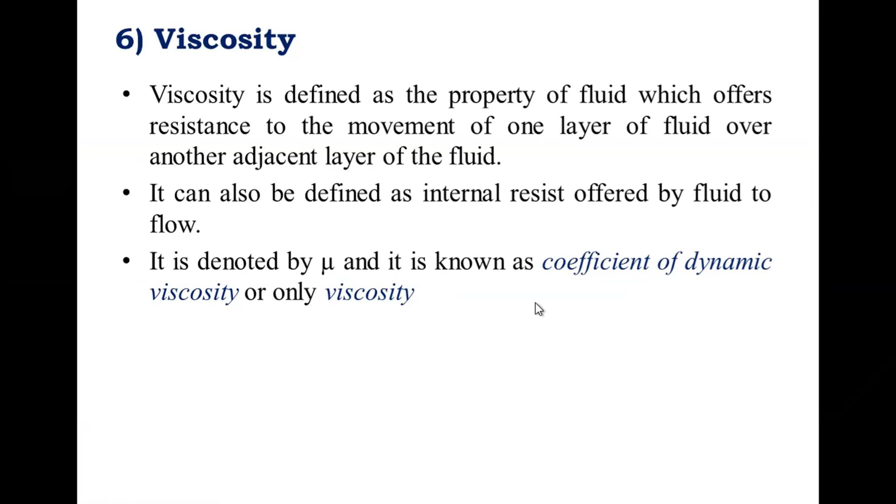So viscosity is the resistance to flow. It can also be defined as the internal resistance offered by a fluid to flow. It is denoted by mu, and is also known as the coefficient of dynamic viscosity, or simply viscosity. So what is this mu? Mu is shear stress divided by du by dy.

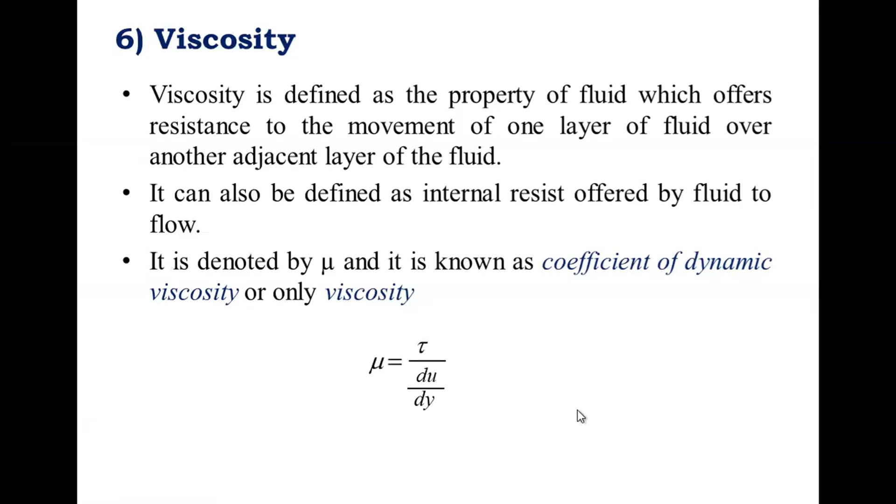So viscosity is the internal resistance in fluids. Viscosity will definitely be present only in fluids, meaning only in liquids and gases - it will not be present in solids. So what are the factors which affect the viscosity in liquids and gases - that we are going to see.

There are two factors. First one is cohesion and second one is molecular momentum. Molecular attraction between the same fluid or same substance is called cohesion. And adhesion means molecular attraction between two different substances.

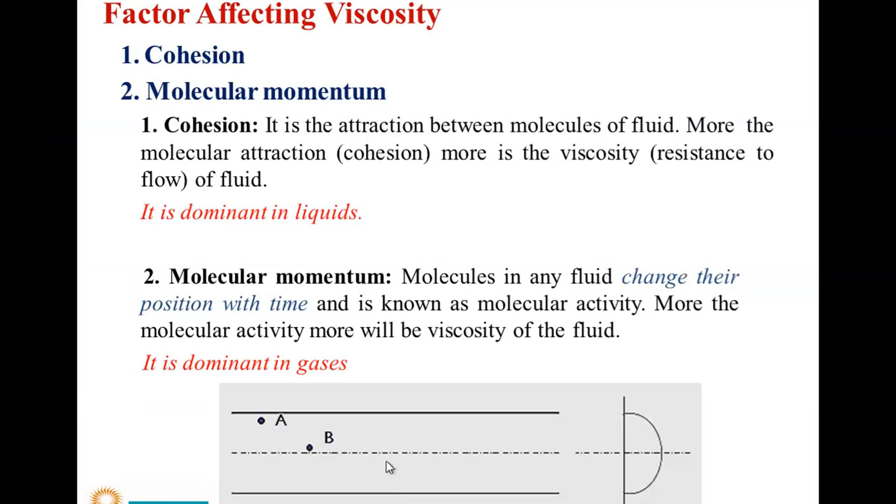So as the temperature increases, the viscosity will also increase in case of gases.

Viscosity is inversely proportional to the temperature for a liquid, and viscosity is directly proportional to the temperature for gases.

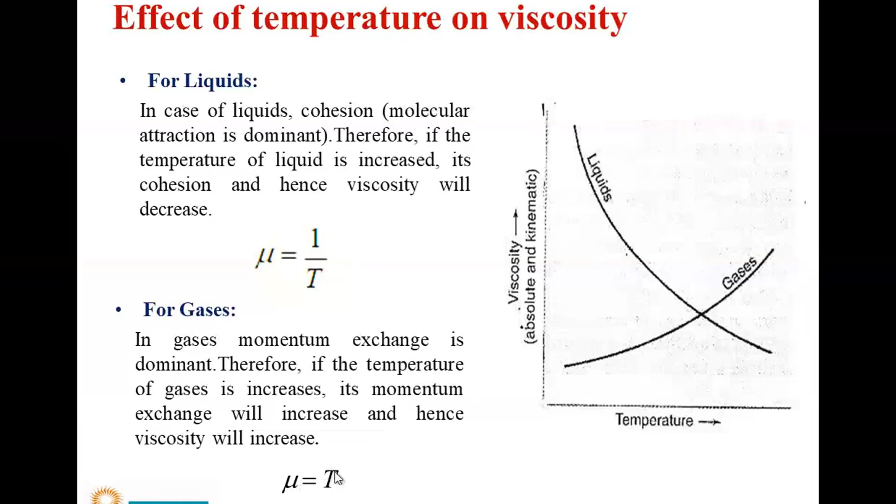Now let's come to that equation that mu is equal to shear stress upon du by dy. Where does that come from? Let's consider two parallel fluid layers, in which the lower layer is moving with velocity u, and the upper layer is moving with velocity u plus du. Both layers of fluid are at a distance dy apart.

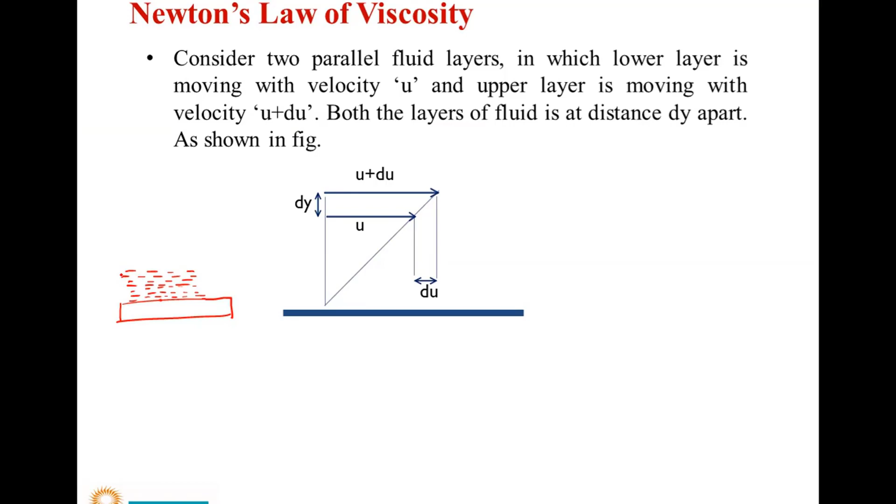So what exists between these two layers? Shear stress. The top layer causes shear stress on the adjacent lower layer, while the lower layer causes a shear stress on the adjacent top layer. This shear stress is proportional to the rate of change of velocity with respect to y, and it is denoted by tau.

So what is shear stress? Shear stress is directly proportional to the rate of change of velocity with respect to y. What does rate of change of velocity with respect to y mean? Shear stress is directly proportional to rate of change of velocity - change of velocity is du, with respect to the distance, which is dy. So from this I can say that shear stress is directly proportional to du by dy.

If I remove this proportionality sign, then tau is equal to mu du by dy. So this mu is equal to tau upon du by dy, which is the equation we saw earlier. Mu equal to tau upon du by dy.

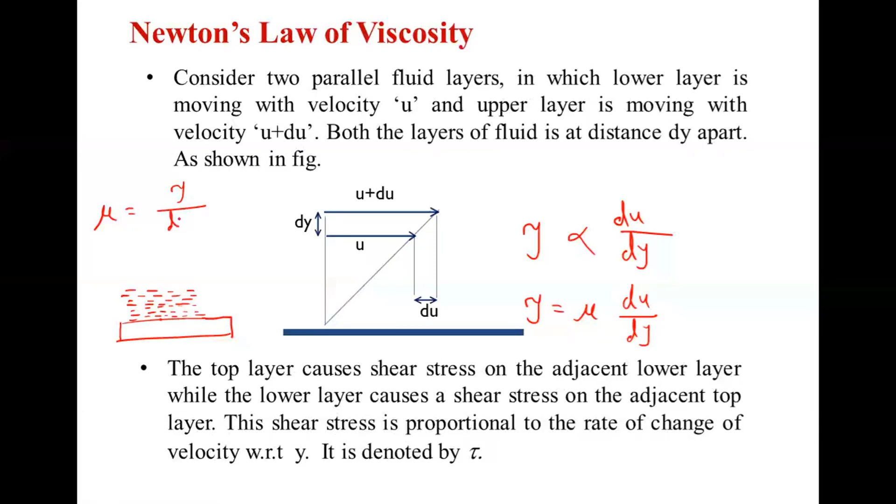So the above equation is called Newton's equation of viscosity, and the equation shows that shearing stress is directly proportional to the velocity gradient, and it is known as Newton's law of viscosity. Shear stress is directly proportional to du by dy. This is Newton's law of viscosity, and mu is equal to tau upon du by dy, or tau is equal to mu du by dy is Newton's equation of viscosity.

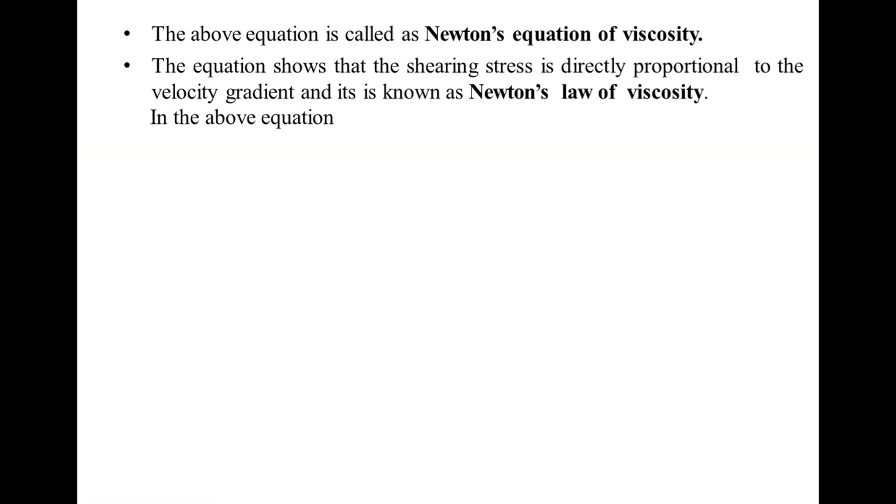So in the above equation, what is du by dy? I already told you it's the velocity gradient. This is also called the rate of change of deformation, or also I can say it's the shear rate - du by dy.

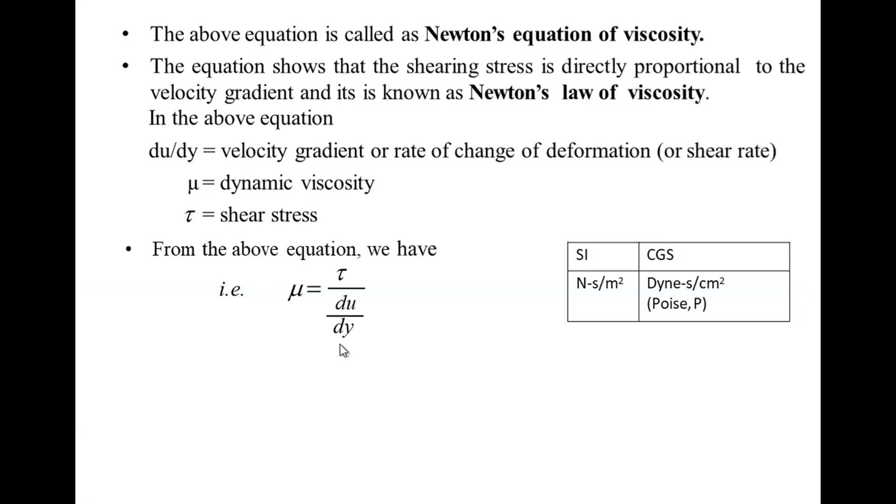Mu is dynamic viscosity and tau is shear stress. From the above equation, viscosity is equal to shear stress upon du by dy. The SI unit for this is Newton second per meter square. Shear stress is Newton per meter square, and du by dy: du is change in velocity, so meter per second, and dy is meter. If you solve this, you get Newton second per meter square in SI units.

In CGS units, it is dyne second per centimeter square, also known as poise. 1 dyne is equal to 1 gram centimeter per second square. This means dyne is very small as compared to Newton.

Conversion: 1 poise is equal to 1/10 Newton second per meter square. This means it is 1/10th part. One poise is very small as compared to Newton second per meter square.

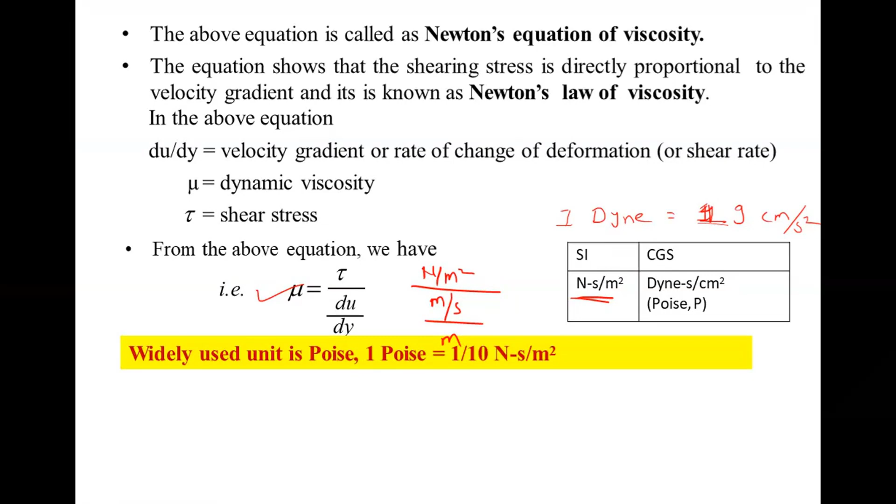One more viscosity is there, known as kinematic viscosity, denoted by nu. Kinematic viscosity is the ratio of dynamic viscosity to density. So what is the actual significance of kinematic viscosity and viscosity, and what is the difference between mu and nu?

Mu tells us the force required to make the fluid flow at a certain rate. What does mu tell us? Mu tells us the force needed or required, whereas nu tells us how fast the fluid can flow, and dynamic viscosity tells us the amount of force required to make some liquid flow.

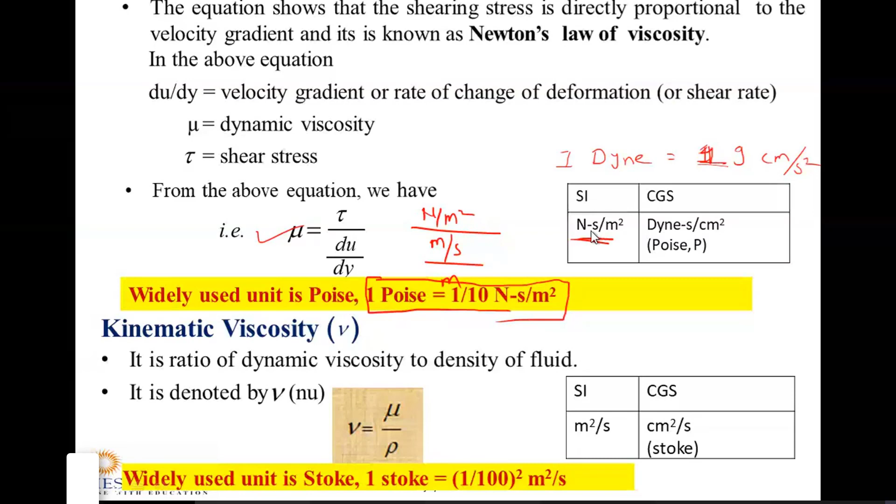So poise is used for dynamic viscosity. Similarly, for kinematic viscosity, we use stoke (stokes). 1 stoke is equal to 1 into 10 raised to minus 4 meter square per second. Also remember that for dynamic viscosity, we use poise and Newton second per meter square, whereas for kinematic viscosity, we use meter square per second and stoke. So this is about dynamic viscosity and kinematic viscosity.

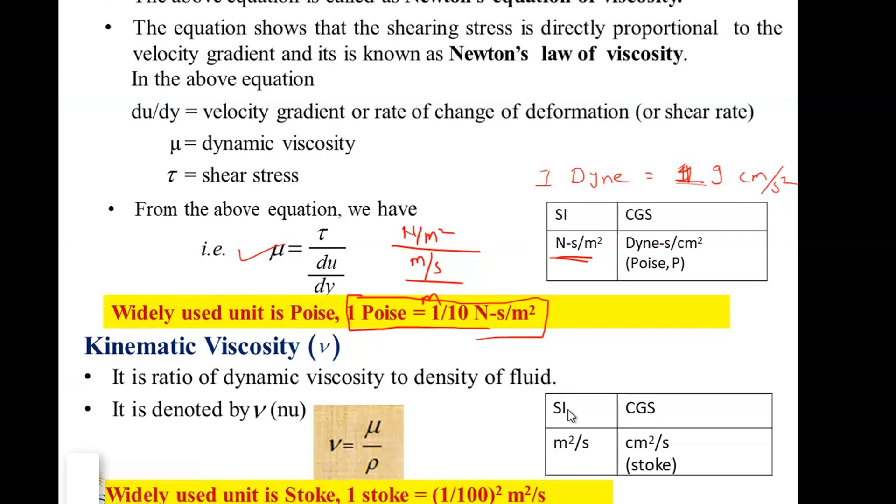Next is the types of fluid. Fluid means liquid and gases, these are fluids. But there are different types of fluid. For example, milk is also fluid, like water and gases. Milk is fluid, our blood is also fluid. The toothpaste which we are using, that is also not a solid, right? That is also fluid, but there is a difference in that type of fluid.

Have you seen mud and slurry? That is also fluid because it is also flowing, but it has particles. That is also called a fluid. So how can we classify the fluids?

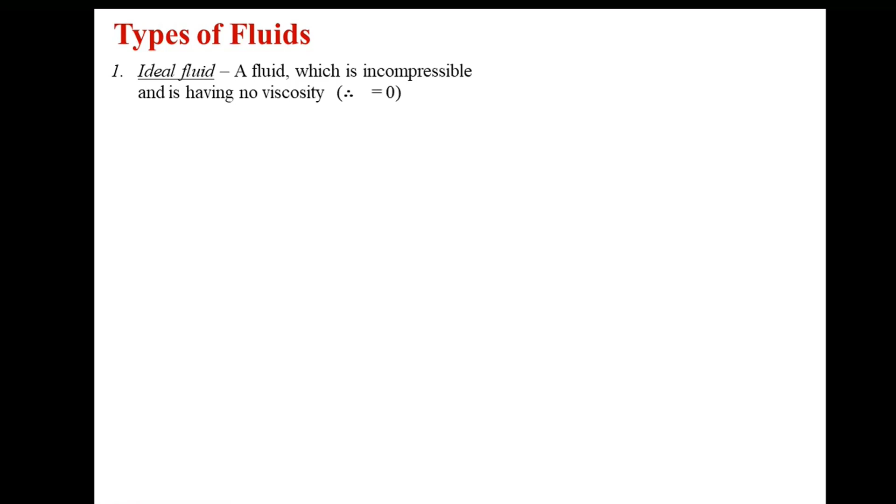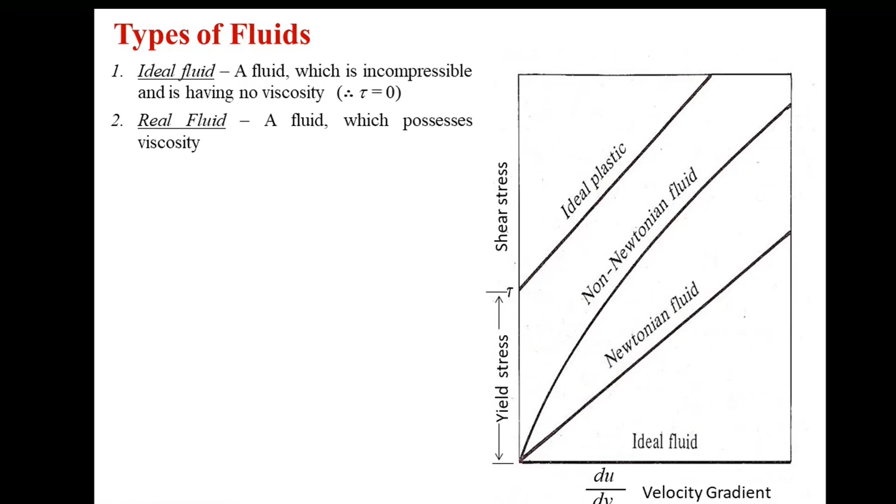First, we can classify fluid as an ideal fluid. Ideal fluid is an imaginary fluid, incompressible and having no viscosity - that is known as ideal fluid. The second one is real fluid, which possesses viscosity, like water.

Then next we have Newtonian fluid. From the name itself you can understand that Newtonian fluid means the fluid which obeys Newton's law of viscosity. A real fluid in which shear stress is directly proportional to shear strain - for such a fluid, viscosity does not change with rate of deformation. In short, the fluid which follows Newton's law of viscosity is called Newtonian fluid.

So here you can see the shear stress, and this is the shear strain. Here the graph is linear and proportional - shear stress is proportional to shear strain. So this type of fluid is called Newtonian fluid.

Then we have non-Newtonian fluid. A non-Newtonian fluid is a fluid which does not obey Newton's law of viscosity. All such kinds of fluids are called non-Newtonian fluid.

And the last one is ideal plastic fluid. Here the fluid in which shear stress is more than its yield value, meaning elastic plus plastic deformation is happening, so the fluid cannot come back to its original position. All such kinds of fluids are called ideal plastic fluid. You can see that this ideal plastic fluid does not start from the origin, since shear stress is more than the yield stress - yield value means elastic plus plastic deformation.

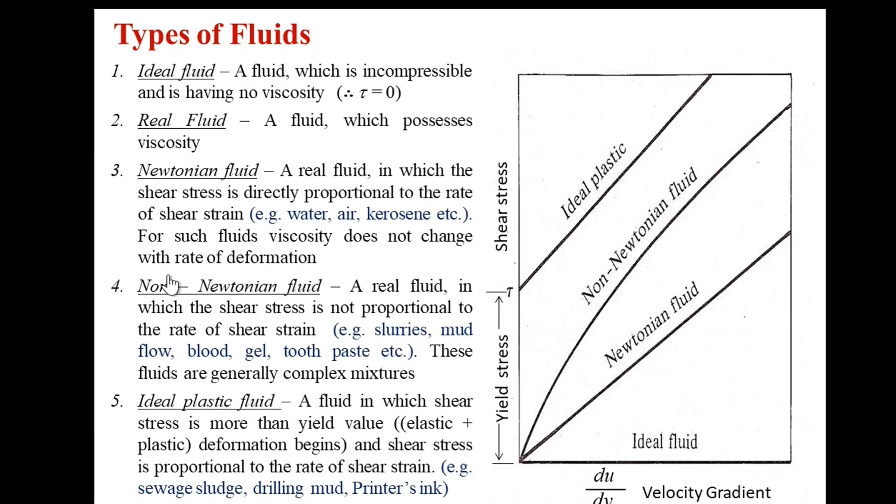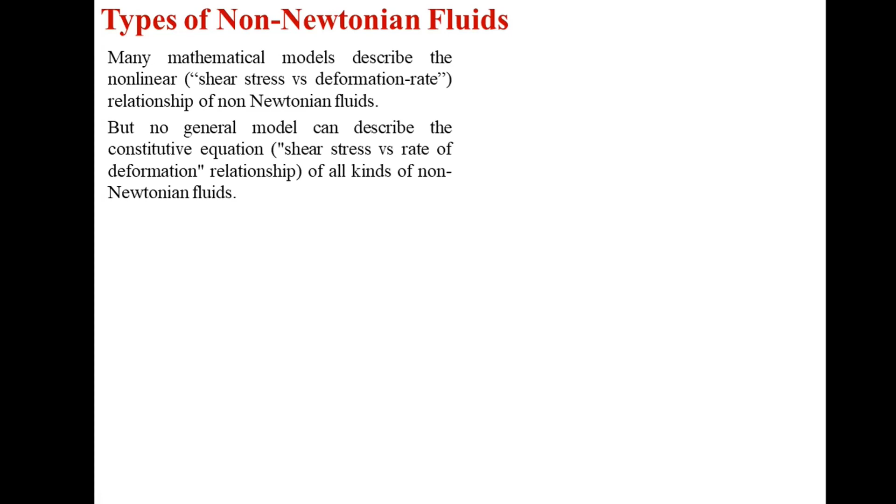Even though we are classifying fluids in such a way, it will be very difficult to create a mathematical model for non-Newtonian fluid. Many mathematical models describe the non-linear relationship of non-Newtonian fluid, but even with much research, it is very difficult to exactly classify non-Newtonian fluid. We've said that non-Newtonian fluid does not obey Newton's law of viscosity, but within that there is variety - we have a number of fluids, so it is very difficult to create a single mathematical model. No general model can describe the constitutive equation for all kinds of non-Newtonian fluids - not exactly, but very much nearer to that.

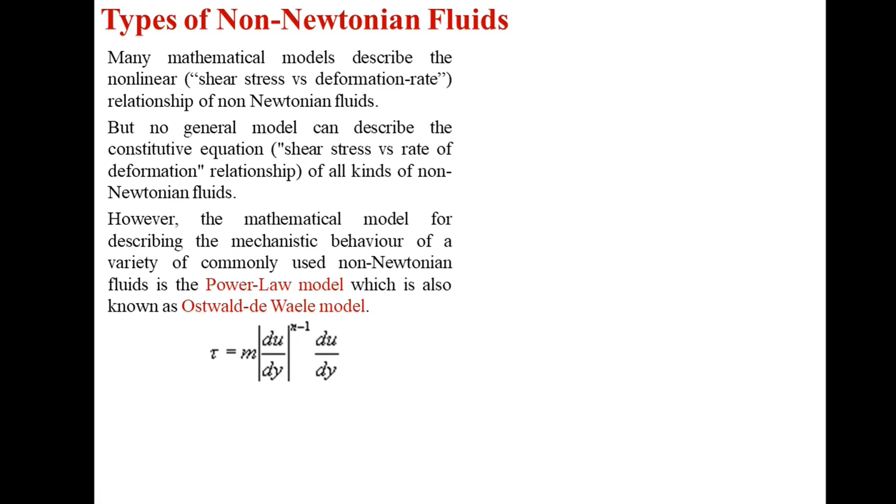The Ostwald-de Waele model has shown Newtonian and non-Newtonian fluid. Newtonian is just for reference - basically it was discussed for non-Newtonian fluid. That equation is also called the power law model. According to that equation, tau is equal to m modulus of du by dy raised to n minus 1, into du by dy. With the help of this equation, we can classify Newtonian and non-Newtonian fluids.

Now in this equation, if the value of n is equal to 1 and m is equal to mu, then this model ideally satisfies Newton's law of viscosity, or Newtonian behavior. When m is equal to mu and n is equal to 1, if you put in the values: tau equals m, which is mu, times du by dy; since n is 1, the exponent becomes 0, and anything raised to 0 is 1, so this whole term becomes 1 times du by dy. So mu du by dy equals tau - that is Newton's law of viscosity. When we put in this value, the fluid shows the property of obeying Newton's law of viscosity, so we can say that it is a Newtonian fluid.